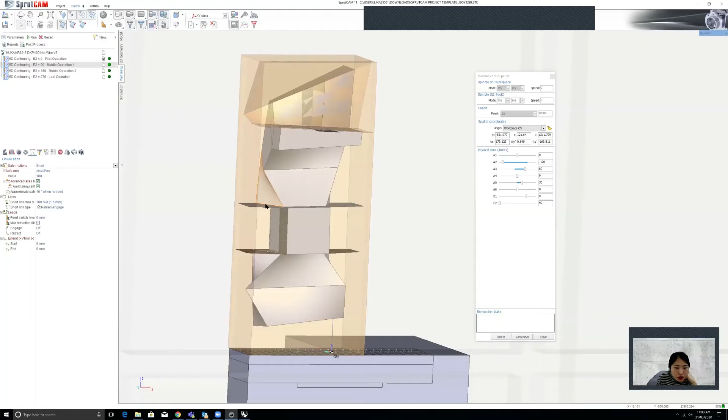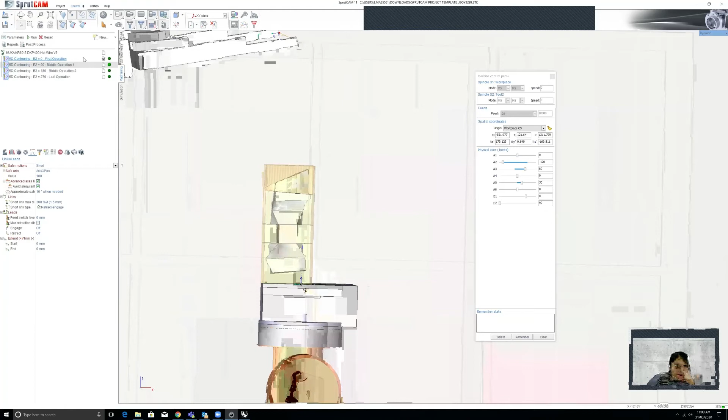So let's say I want to cut this one now. And one thing to remember is here I can cut these two at the same location of the table. So what I want to go ahead and do is actually duplicate this middle operation. I kind of mentioned earlier that it's not a good idea to duplicate the first and the last.

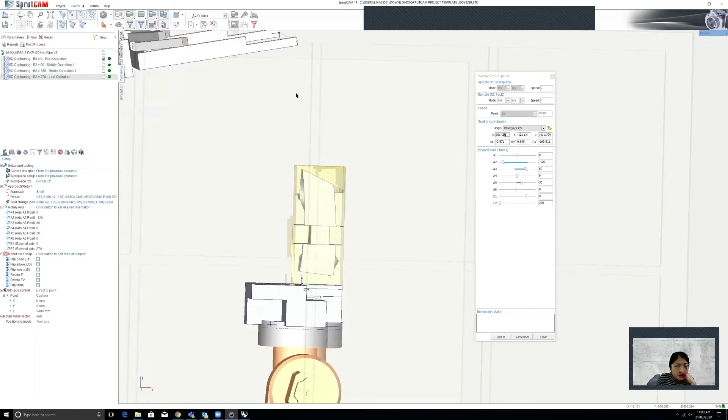And the reason for that is we have already inbuilt in the setup its approach and return positions. That means it starts from home in the first operation, and in the last operation it ends on the home position. So I wouldn't like you to duplicate those because you're going to be going back to the home every time you duplicate the first or the last operation.

Just a question with that last assist geometry we did. Is it best to break them down into small geometries like that one there? Or would it be better to continue that one down the next face and do essentially as many as you can in one go? So to do as many cuts down that vertical face as possible, or to come in and do little segments at a time?

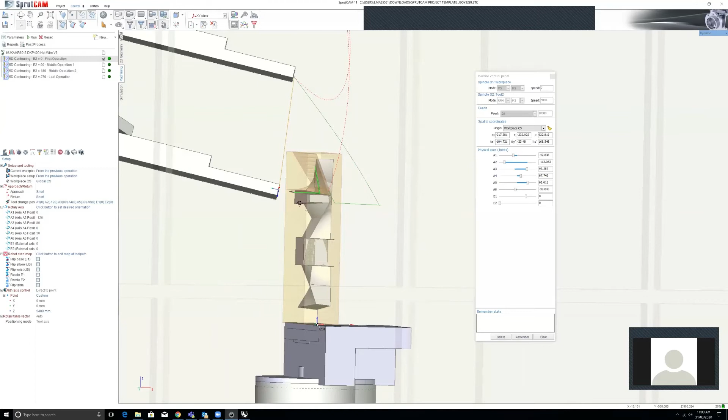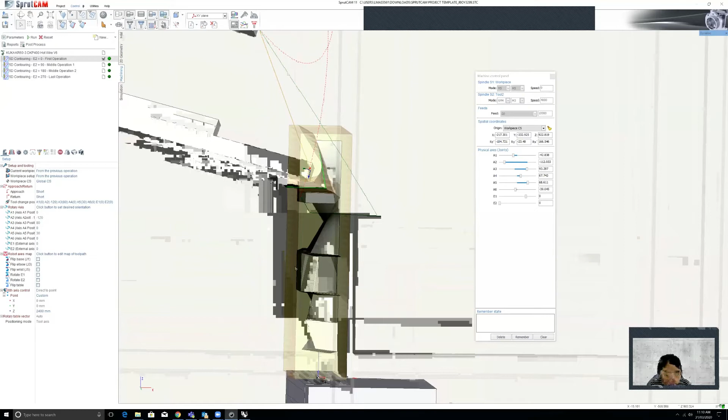I see. So I think here you have this cut here, then the next one, maybe you could consider doing this face, making an assist geometry. If they're in line with each other, then you can have like a giant rectangle that covers these two faces if they're in the same plane. And then the next geometry might be doing this cut here, 1, 2, 3, 4, coming out.

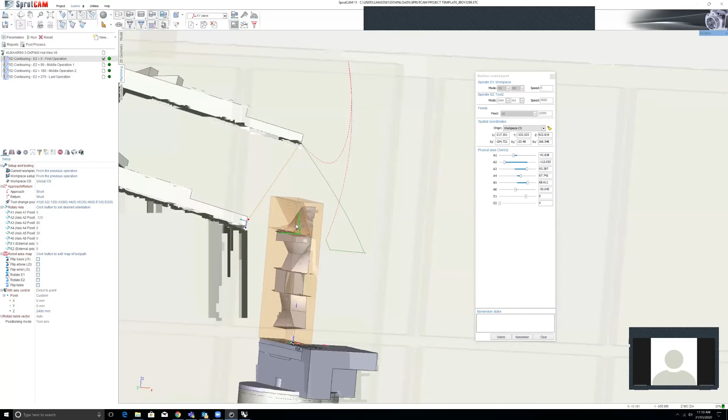Yep. So it is better to break it down into smaller segments. Don't try and run it as far as you can in one go. No, I wouldn't do that. Yeah. Okay. Only because you might end up getting filleted corners as the wire is changing speed. Yeah.

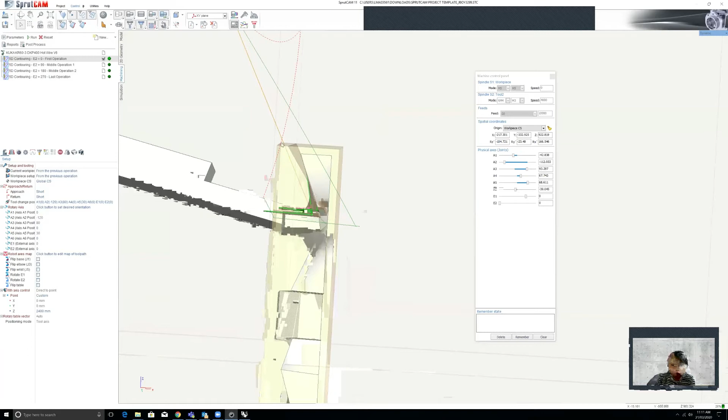There is also an option for you to actually use the assist geometry and make it one single surface by, how you have done here, kind of extending it out of the surface. Yep. If you wanted to, you could actually go ahead and extend that, come down, out maybe by 100, and then go back in. Okay, right. That, and then come out again, down, and follow that. And that would just reduce the amount of steps required in this process? That's correct, yeah. Okay. All right.

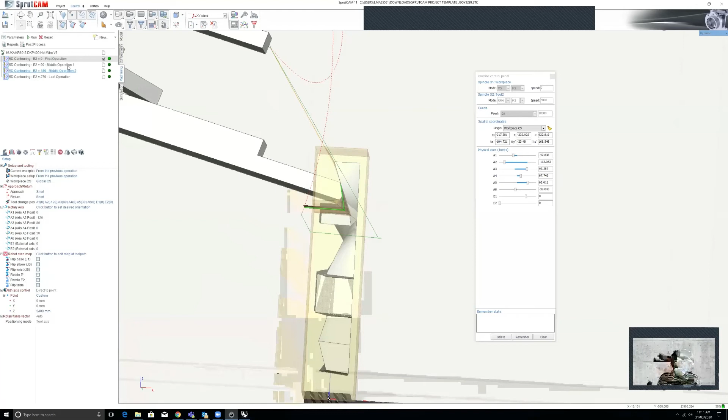So then what we can do here is, if we go to this next operation, we can go ahead and duplicate it. And that's just right-click, copy, and then right-click, paste. So we see a middle operation 1, middle operation 2 here. I want this to be more up there, so just drag to order the table rotations. And then we can just leave them as they are.

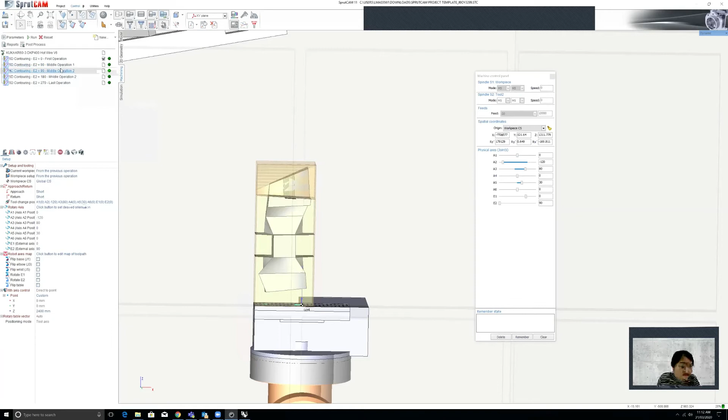Sometimes you might say, actually, I want a duplicate of the E2 equals 0. So what you might want to do is, for example, if I wanted this operation as E2 equals 0 and not 90, I'm going to go ahead and just go rename. Take that into E2 equals 0.

And then in setup, here it says E2 is 90. I'm just going to go ahead and change that to 0. And make sure you click out of it. So you see that we now have 2 operations at E2 equals 0. Then the next one is E2 equals 90.